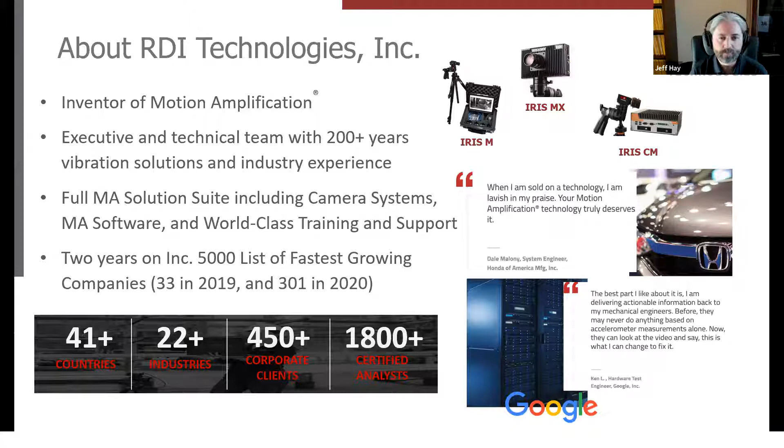Okay, so let's go ahead and get into it. What is motion amplification, right? So you're going to see some videos here. Sometimes you'll see a single video. Sometimes you'll see a side-by-side. The left is an actual real video. The right is a motion amplified video. That's really what that engine is doing, and so we'll loop this and you'll see, but this is an engine startup, right? So on the left-hand side, again, that's what you see with your eye.

You open the hood, everybody's opened the hood of their car and they've watched it start up, right? You can actually see some of the fuel lines start to vibrate there right before this engine kicks on. And you can see it go into the startup and then now it reaches a steady state. But the idea is what we're doing is full field vibration. We're measuring displacement across the entire field of view, pixel to pixel. And then once we can measure that displacement, we're able to visualize it, increase that to a point that it's visible by the naked eye.

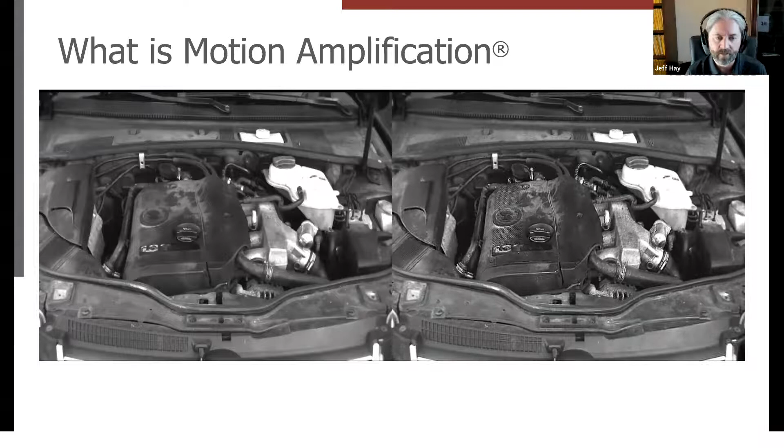So let's look at a couple everyday objects. This is a glockenspiel. I call it a xylophone, but my son's in band and he informs me that is a glockenspiel, and not just a xylophone. So in this situation, you can actually see the key vibrate here. I think we'll pause there for a second. You can actually see the key vibrate, and you wouldn't normally be able to see that with your eye. That's actually 1,170 hertz. So not only is it extremely small motion, but it's extremely fast motion.

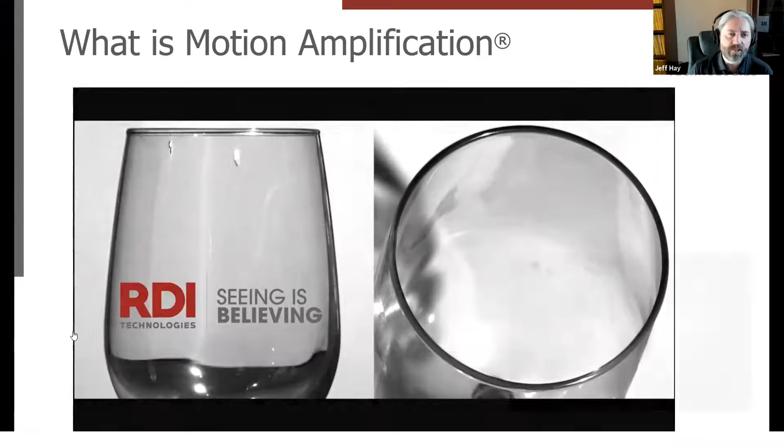And then maybe just another everyday object here. This is a wine glass, right? So that's a wine glass at 750 hertz, just oscillating from a single tap with a spoon, so you just kind of tap it. So just an idea of what we're talking about, but really in terms of technology, what we're trying to do is turn every single pixel into a displacement sensor. So in a nutshell, you're able to measure the vibration across the entire field of view.

So let's take, for example, the scenario of a megapixel camera, right? That's 1 million pixels, and that's sort of a modest camera even. But if you think about each pixel now being a displacement sensor, now you're able to cover the entire field of view with millions of sensors. In an HD camera, that's 2.3 megapixels. That's 2.3 million sensors you've got all over that structure, and you're able to measure the movement of it. And so you can actually do that, and you can actually measure it. You can see it in these examples. We're showing you the visualization, but you can see it.

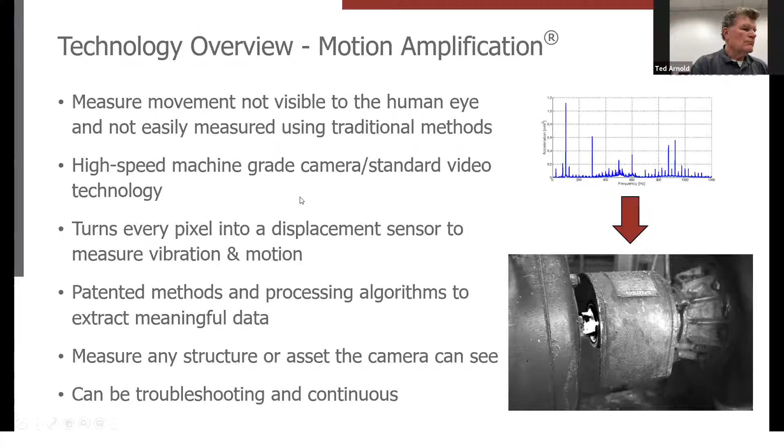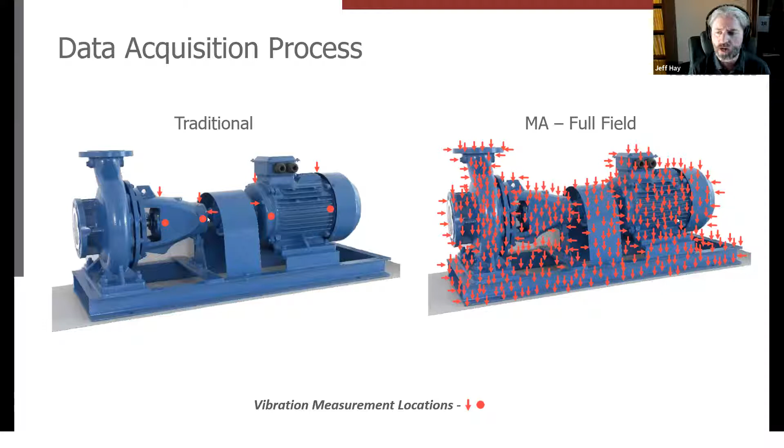Okay, so we talked about this idea of full field vibration, right? So this would be maybe a traditional way of measuring an asset. You've got this motor and this pump here. You might have some contact sensors on it. With motion amplification, again, it becomes that full field vibration. Not a single point is being left untouched with the measurement. So let me show you a short video that kind of hits that home here.

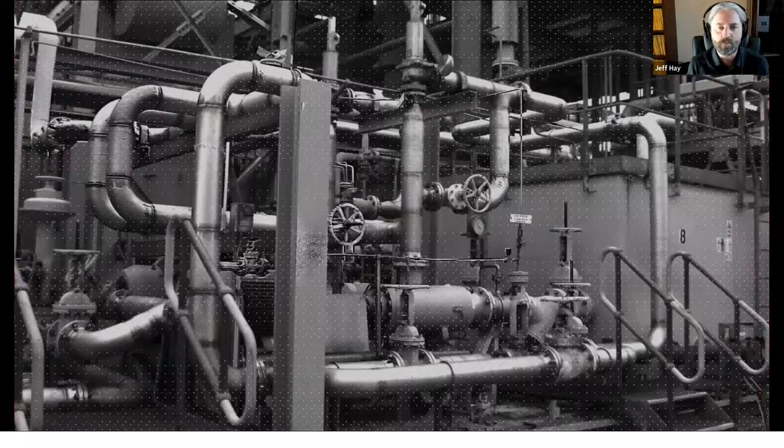So this is the idea that maybe if you had a single data point, you would be measuring that, or two data points, you might be measuring this, right? But imagine if the entire asset were covered in measurement locations, you would see something like this. And this is what you would be missing, right? You would get a high vibration, or you measure some motion, and you would see that, but you might not have any idea that this is going on with your asset or your test cell or your product that you're designing, because you're not seeing the full picture.

So just talking a little bit about the benefits. One is the ease of use. Users of the technology really benefit from the idea that it's more like a GoPro taking video than it is about collecting data. Really, you sit down, and I'll do a live demonstration. You set up your focus, the lighting, you get that right, and then you're ready to take the data. So it really is more akin to taking video than it is to taking data, which I think is more intuitive for most people.

So the non-contact and non-destructive. Those in the automotive industry know that there's lots of times that there's light curtains, things like that you might not be able to get behind. There's barriers to entry. There's areas you can't go in. That becomes problematic. And then of course it's non-destructive. So there's no surface preparation, nothing that you have to put on the object. You literally can stand at a distance and collect all the data that you need.

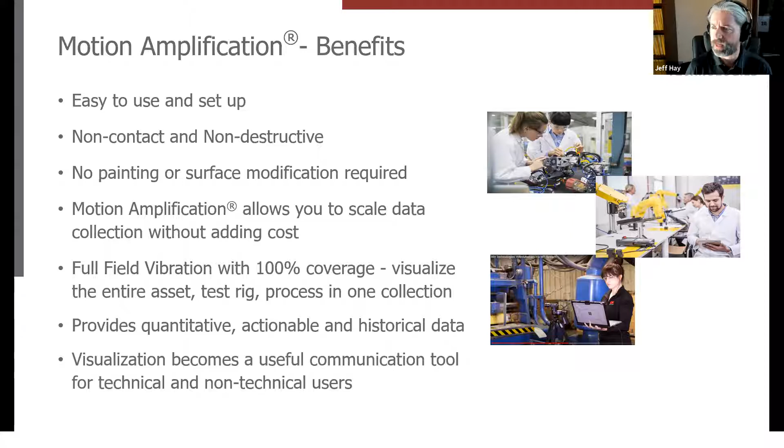So let me give you an example of one of the use cases with the idea of the full field vibration. So in a lot of instances, you need to pre-screen for sensor placement. You're going to place strain gauges on an asset, right? And you think, where do I need to place these strain gauges? Even moving a strain gauge 1 inch over has a tremendous impact on the data. So you really need to understand your game plan about how you're going to collect the data and where you need to be placing your sensors. And that can be a very, very time consuming process.

By using the tool as a pre-screening to understand what your asset's doing and how you need to place those sensors can have a lot of value, save a lot of time, and eliminate a lot of sensors that you need to use. And I'll kind of reinforce this concept throughout the talk in some of the video demonstrations.

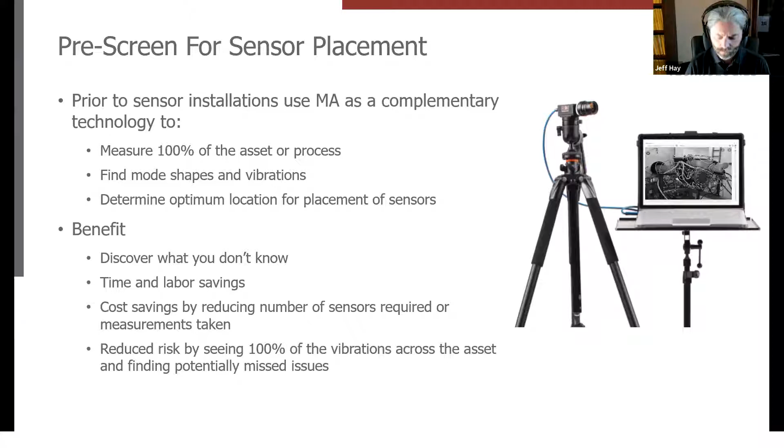So right now, though, what I want to do is a live demonstration. I personally think a live demonstration makes it easier. It sets the stage for a lot of the videos you're going to see in a lot of the case studies. One of the nice things about this demonstration is you can get an idea of the process that's involved. So any of the videos that you've seen so far, or you will see, this is exactly the process that it took to get those videos collected. So let me do that real quick.

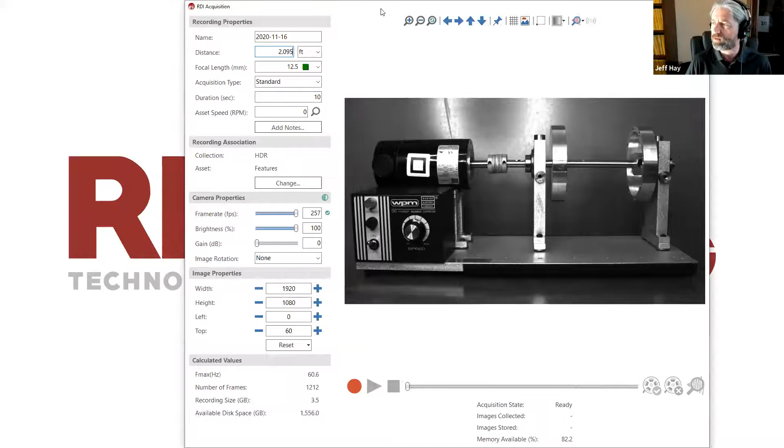And I'm going to turn on our acquisition software here, right? So I've got this little motor rotor kit. These are used to train people with different technologies in measuring vibration and things like that. So one of the things that you have to do is set your focal length of the lens, right? And you put in the distance.

I use a laser rangefinder. You can kind of see that on the screen there, maybe on the motor there, moving around. I just get the distance that calibrates it. I put that in and you're ready to go. So I'm going to turn this on. I've got this on a little smart switch. I'm going to turn that on.

Okay. So I've got that on and I am going to start taking some data. But one of the first things I want to show is kind of the speed. One of the really, really nice things about the technology is you can do it live. So I'm going to adjust the brightness just down a tad here. Get that just right. Here we go.

Okay. I'm going to turn on the live amplification. So you can do this live and show that here. And if you want to actually see how that thing moves live, you can do that with the live amplification. So one interesting thing is to use this as a screening tool. You can set down the tool and you can look at the asset and immediately be able to see all the motions that are present.

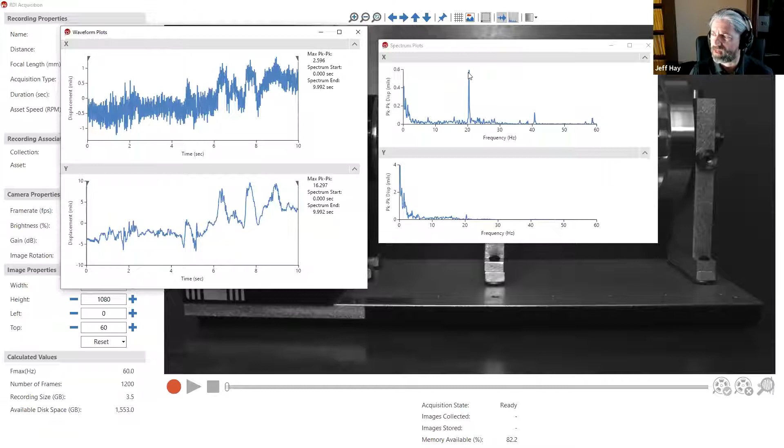So anywhere in the scene, you can draw a box and get a measurement and a frequency spectrum. So that's actually what the asset's doing when I collected that. And that's giving me what they call a time waveform. So that's the displacement in mils, calibrated. And this is the frequency spectrum. So we can see that it's running right around 20 hertz. Right? I can do that anywhere in the scene.

If I wanted to move that box over here to the motor, I can do it as well. And it makes a measurement. So again, this is just a way to be able to do things very quickly in the field to take measurements and understand what the asset is doing.

Now, the other thing too is that we can go to this standard measurement, and I'm going to take just a short 3-second video. So if I do that really quickly, I'm going to turn that off so that the motor is not running while I'm talking as much. And then I can immediately go into motion amplification. And then I can play this back and show you, amplify it and see all the motion. And then I can make measurements anywhere I want, right? Again, just this quick.

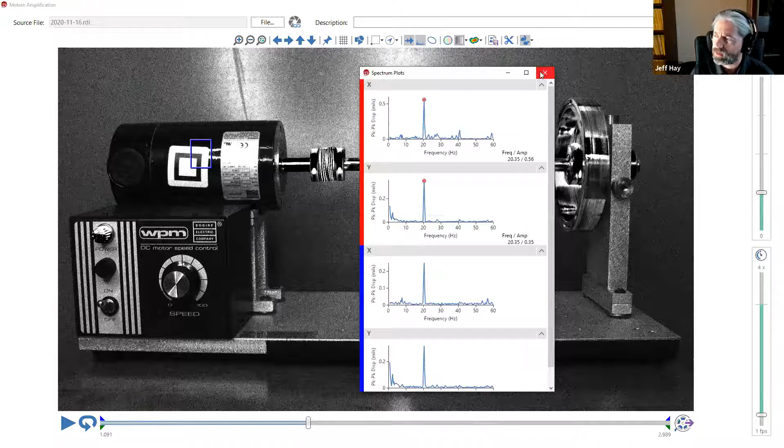And all this data can be stored and saved for comparison. So if you're doing product design, you can archive this data or compare it from product to product to be able to understand it. Now, I had mentioned that there's some other things you can do with it. The displacement measurements are one of those things. But the other thing you can do with the motion amplification videos is filter. So it's also important to understand what is occurring at different frequencies.

So in this case, we can go through and open up this filtering window and say, I would like to be able to see the motion that is associated only with the running speed, that central peak. I could do this for any one of those peaks, but I'm going to pick this one, right? And I can see that it's moving both in the X and the Y. And I can hit apply here. And that's going to go through and do filtering to only allow what's green in that spectrum. So now we're only going to show that one frequency.

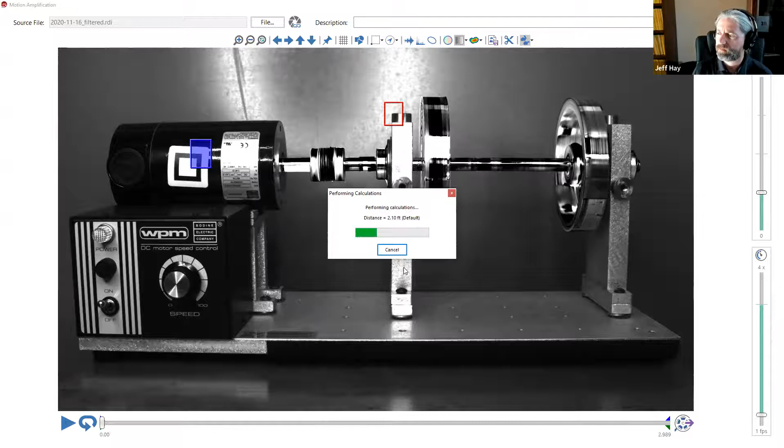It's kind of going through and recalculating all the displacements. But now this is just the motion associated with the turning speed of that motor. So let's say that you had a process that was frequency related, and you had vibration throughout your process that was causing issue. You could relate it back to this frequency here based on the video itself and understand how everything's moving.

Let me move this to a more industrial application. So we've got a question here. It says, can you measure the RPM of the shaft? Yes, you can. So we do have a tool that you can draw a box anywhere on the shaft and it will measure the speed. And then we also have another tool called shaft inspection that allows you to go in and image the shaft. So let me just show you that really quickly.

So bring this back up and I'll turn this back on. And then I already know what the shaft speed is. You could go through and measure it, but I'll just enter it in to show this other, because I think that this is interesting to show. We're right around, let's see where we measured that at.

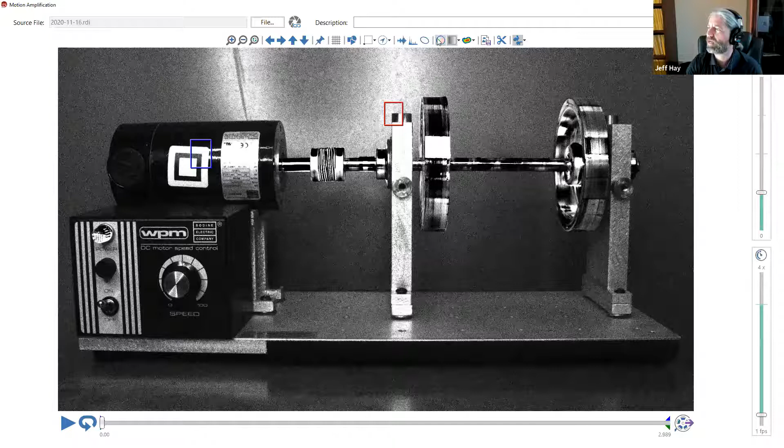Okay, so we had measured it at 20.35. So let's put that in. So if you either measure it or you know what it is, you can enter that in. I'm just converting. I'm a Hertz person, so I always have to pull out a calculator. But this is also shaft inspection too. You could measure that, but it's less interesting as a demonstration.

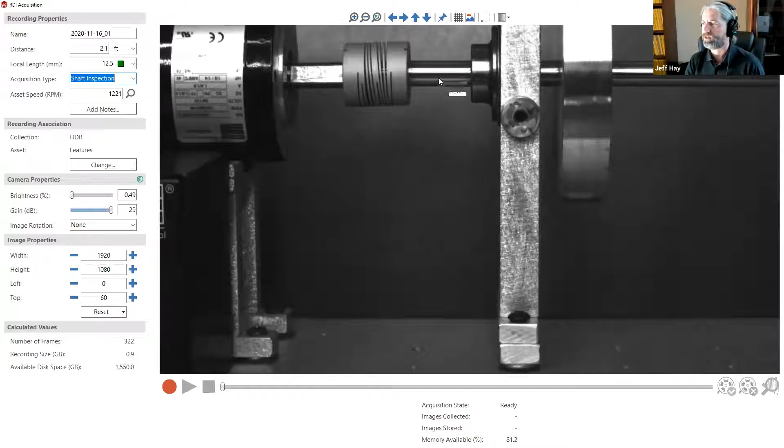This is a little bit more interesting in that you can actually put the camera into a different state to inspect rotating pieces of equipment or belts, pulleys, any of that kind of thing by matching the speed there and actually getting the camera into a different state we call shaft inspection. But it's good for any rotating equipment. Okay, I just wanted to demonstrate that along with that question about can you measure shaft speed, which you can.

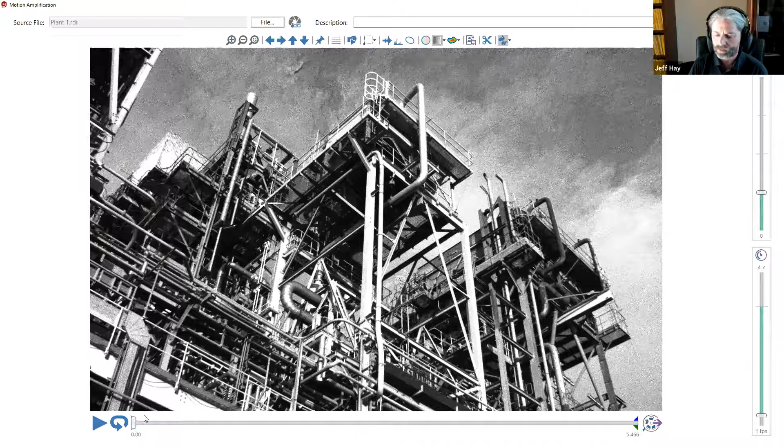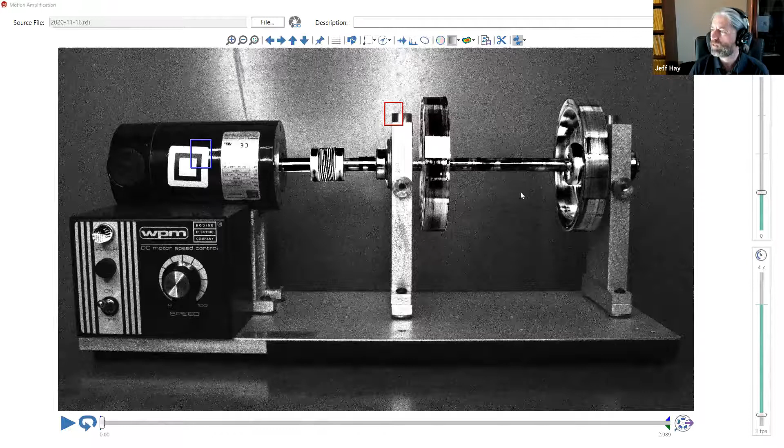Okay, so let me go back to the concept of the filtering. We had just left that demonstration where I filtered the rotor kit, but that's a little less interesting because it is single frequency that drives that. So what I want to do is demonstrate this concept of filtering here. Let me get up the right one. Here we go. Okay, so I want to play this back for you because there's a lot going on in this video. So play this back and speed it up a little bit.

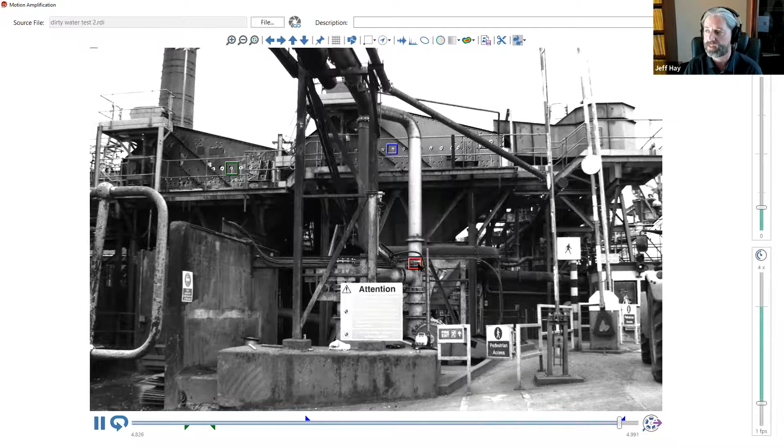Okay, so you can see that there's a screen here moving and a screen here moving, two screens at different frequencies, and then there's a pump moving here as well, right? So I've got my amplification span changed here. You can choose what time you want to amplify. There we go. Okay, so you can see these different things moving. If I pulled up the frequency spectrum, you can see they're all at different frequencies, right?

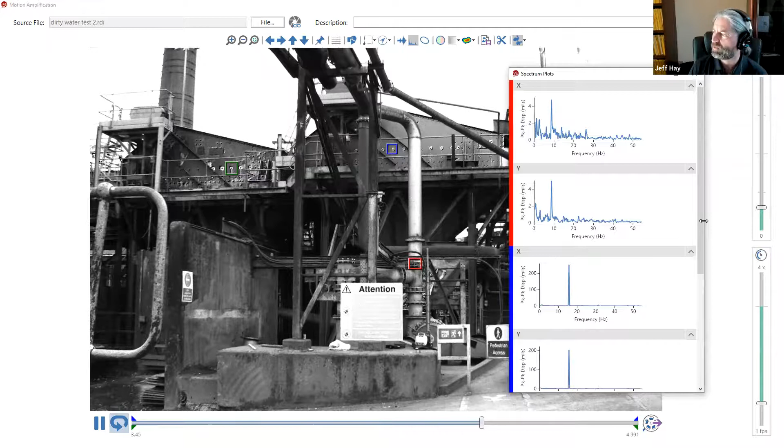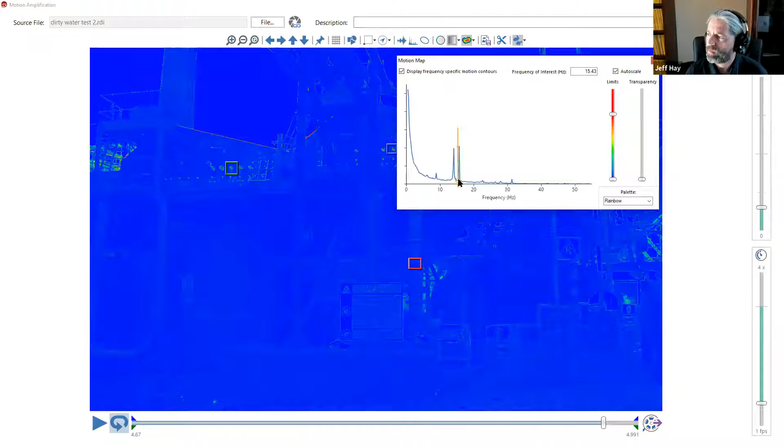We've also had this process called motion map, which is a visualization of frequency with a colorized image. So I can actually overlay on top of this these individual motion maps at particular frequencies and highlight what's moving at that frequency. So in this case, at 15.43 Hertz, you can see it's this screen. And then at 14.02, you can see it's this screen. And then at 8.82, you can see it's the pump.

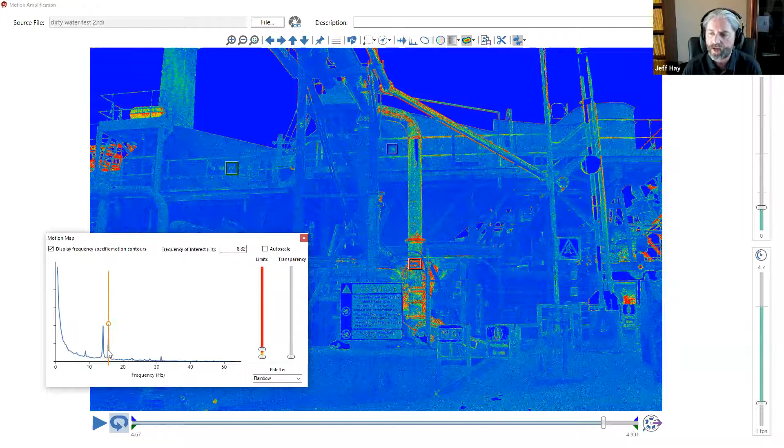Now, let me show you one of the interesting things in terms of being able to evaluate and understand your assets or your product. If you notice, for example, this railing is moving, right? And that might pose a problem for you, and this railing could be anything, an unwanted vibration. And you notice that it's moving at this frequency and you can feel it moving when you walk there maybe. But if you look here, you notice that it highlights at that frequency too, but even more strong, so it's redder under that frequency than it is under this frequency. So you can see that there's likely something going on.

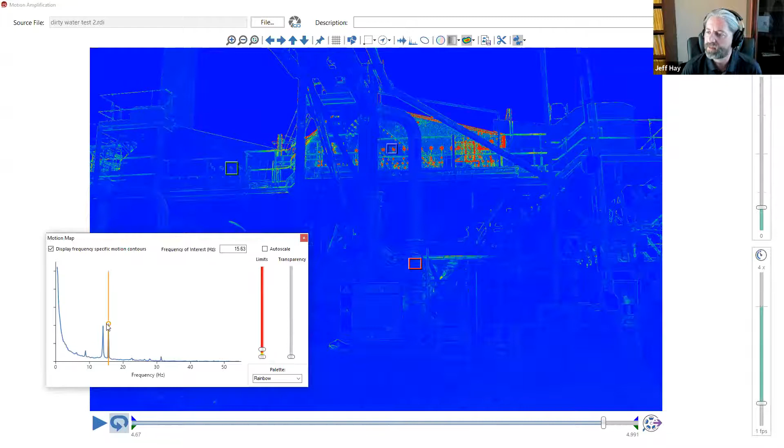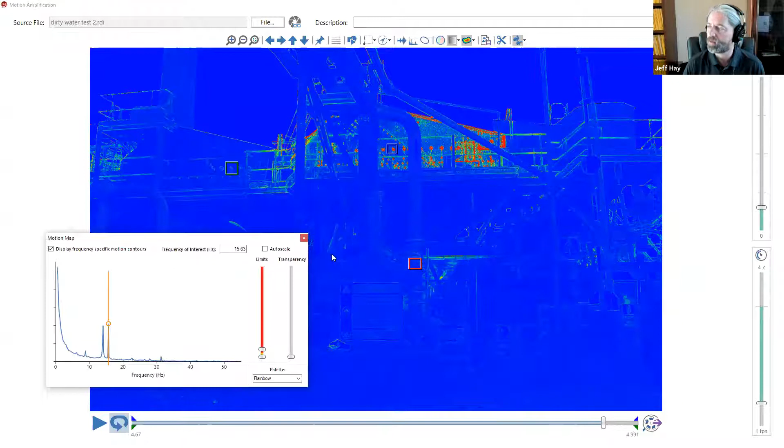Intuitively, you might think it's going to be the vibration of that screen right before it. But it turns out that it's more likely that this screen is coupled to it, or it has a preferred vibration at that mode. So just this idea that you can actually image this so easily across the entire field of view this quickly allows you to be able to see these vibrations.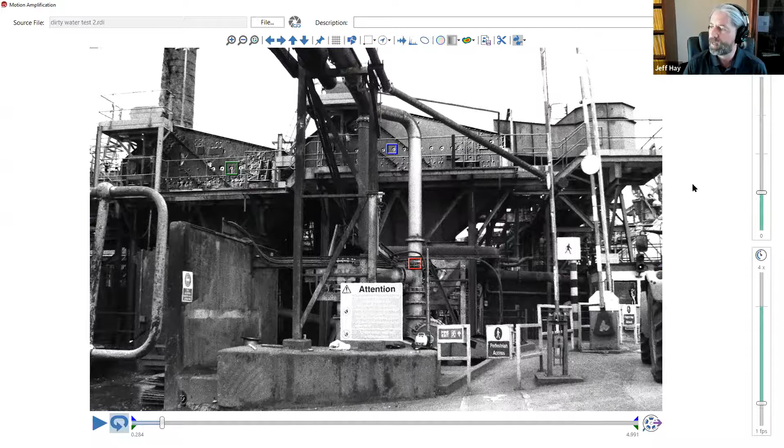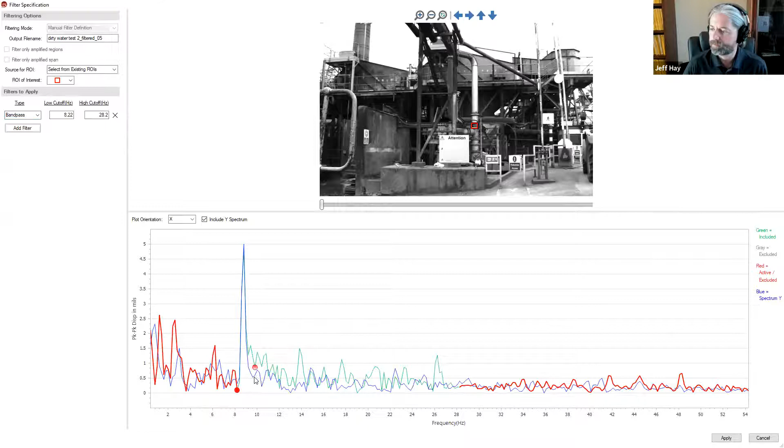And so if you go through and turn this motion map back off, we could go through and filter. Now, again, watch this. You see all these screens moving, everything moving. I'm going to go through and now do something a little bit more interesting than just that rotor kit that I showed as a demonstration. I'm going to filter for the pump, so that's going to keep this area inside there and block everything else.

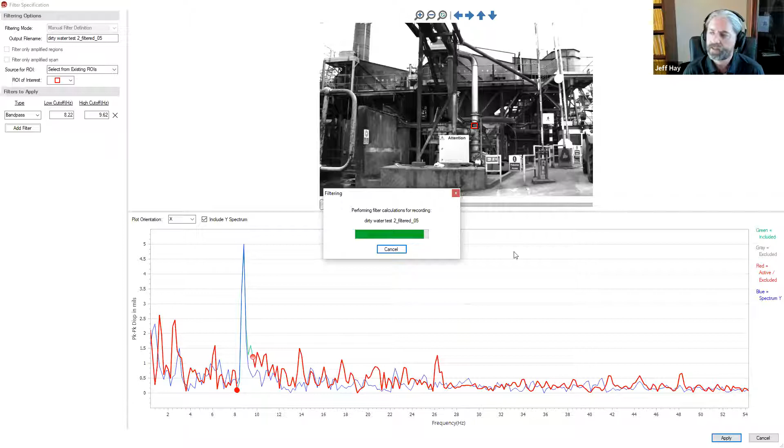So what we should get as a result is the screen should stop moving and the pump should continue to move. And again, this is all done in real time. There's nothing going on here that you wouldn't be able to do in the field. You could be right in front of this asset doing this exact same thing. That's part of why I like to do the demonstration, because this tool is mostly used in an industrial setting, and people need to understand what goes into it.

So, okay, now let's play this back. I'm going to amplify this, and you can see that the screens have largely stopped, with the exception of whatever this pump's doing to shake them. And the only thing that's moving is this pump driving this pipe work all the way through the system. You can see how much vibration it's inducing all the way through this network of pipes, all the way down through here, and then into the system here.

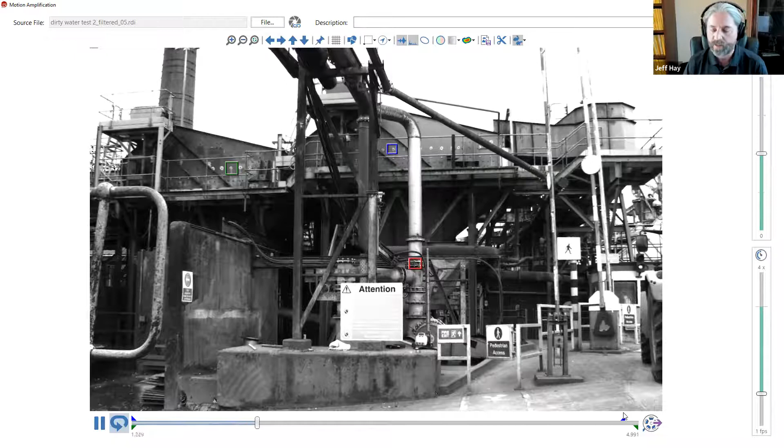So again, I just gave you a short demonstration of some of the tools. There's a lot more that goes with the technology, because really what we're doing is full field vibration. So there's all these new ways to leverage vibration, because we're extracting it from a camera.

Okay. So I might return to some live demonstrations, but I'm going to go into some examples of case studies here. Let me get PowerPoint up here, and let's see if it will behave for me. Okay, there we go. Get all the windows back up. It likes to do its own thing and take over all my screens.

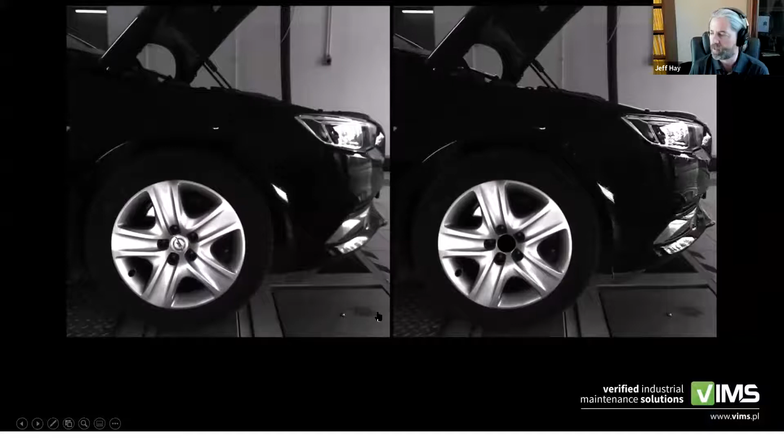So just to give you an idea here, this is in automotive. We're going to go through a few automotive examples to show you product design. This has gone under testing, and this is actually induced vibration here. You can see a little bit of vibration of the wheel, but what's interesting is you can see the vibration all the way through the body. So if you're doing simulated road testing, you can actually visualize how things are interacting with each other and how they're vibrating. And it gives you a very quick analysis.

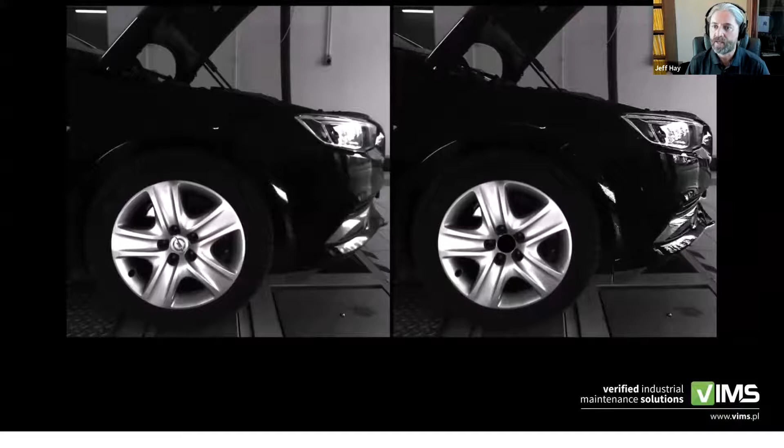To outfit this with sensors everywhere would be very problematic. You can do it in pretty short order with the camera, because you don't have to pick and choose where you measure. It's also really interesting because you don't know what you don't know. You don't know to place sensors in certain areas. Wow, I didn't know that was going on. We would have never thought that.

We had a group that uses it for training on vibration, and they brought it into their test lab. The equipment they actually train on to show faults in mechanical systems had a fault in it, and they just didn't know, because they didn't know to place sensors there. The foundation had come loose. So again, you can see the way all these systems behave.

Let me show you another, a little bit more comprehensive. This is a car testing through revving of the engine. We have this capability of putting vectors on the screen. You're measuring displacement, but we can graphically show how big it is by the length of the vector, and the direction by the way it points. So this is revving of an engine, and you can see the displacement and the way it responds. One of those is a time waveform that's been extracted.

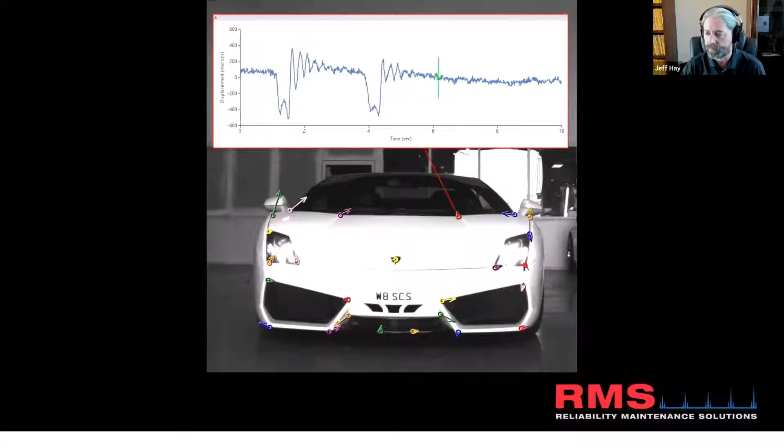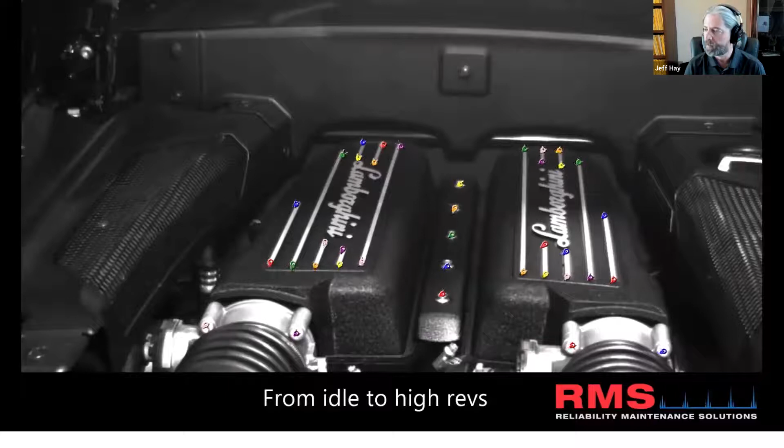So here it is on the engine. Again, just to give an idea, the data is all there. You can pull out all the data and also use it as a communication piece. You can see what's in phase, what's out of phase, what parts are moving together, what's responding to what. When one piece moves, what is everything else doing?

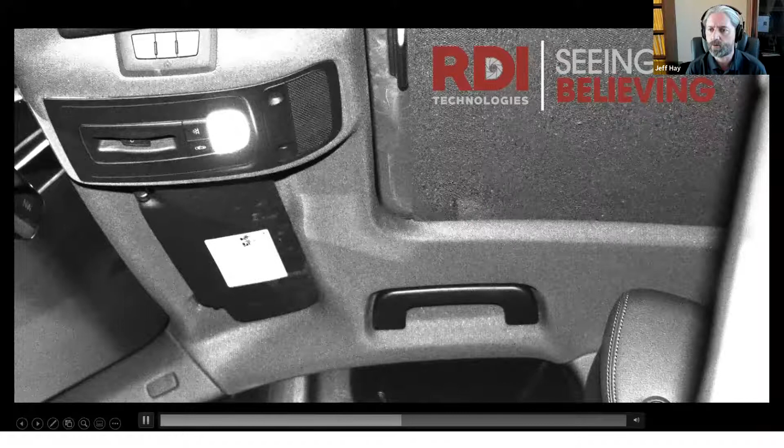This is an actual sine sweep of an interior of a car through a subwoofer playing and actually vibrating and showing. So in this case, we could hear the rattle, but we didn't know where it was coming from. And when you did the sine sweep through this, you could actually see this console panel at the top vibrating and immediately show you exactly where the vibration is coming from. Again, you could apply the motion map to kind of hone in on that as well.

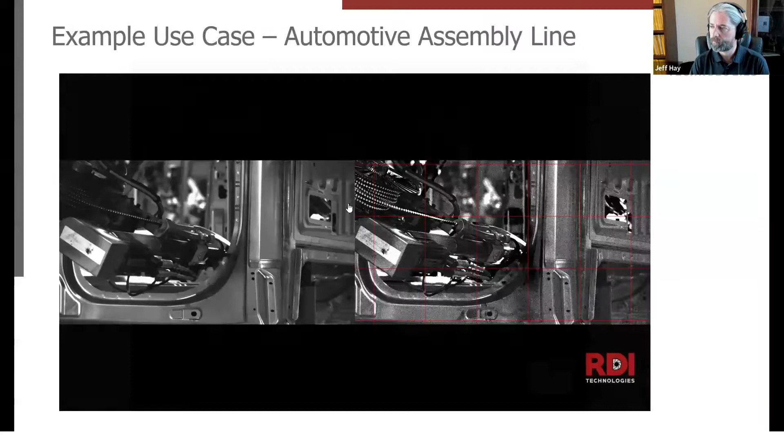So this is a rivet gun. What's interesting about this is one, the failure of the part, but also the way that you can see the body shake as well. Placement of this is really important, but there's also upstream and downstream vibrations that are going on too. So for example, this is all behind a light curtain, so you don't have to stop anything. You can retroactively monitor equipment like this, be able to determine, one, the vibration on those rivet guns, to determine wear and tear. But second, in this case, be able to determine what else is going on, right?

You can't put sensors on those body parts during this process, right? That's actually a piece in production, but you can measure it non-contact this way and see when it vibrates. Is an upstream process causing that body part to vibrate right before the rivet gun gets placed? And could staggering your timing of the different stages in that process help? That's a really challenging thing to be able to do, because you can't stop the process, but anytime you can go with the camera and just simply measure it.

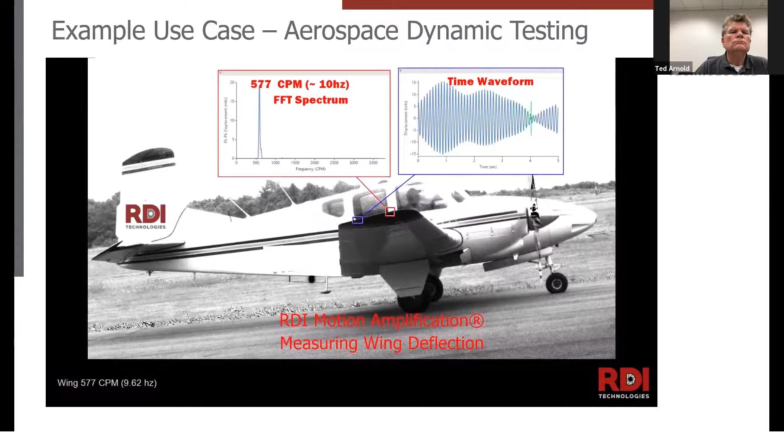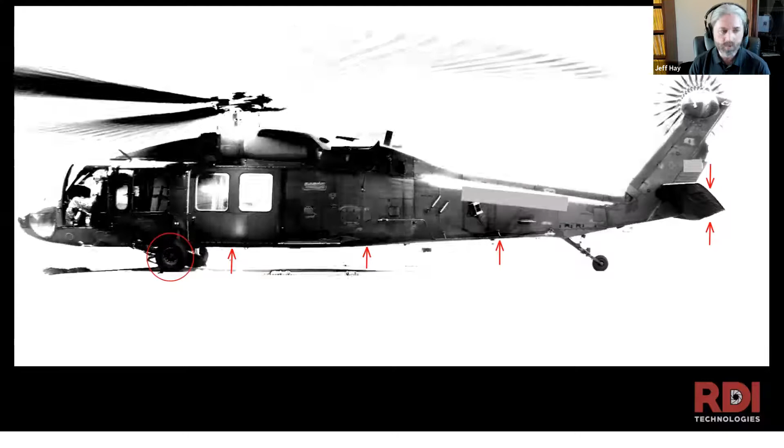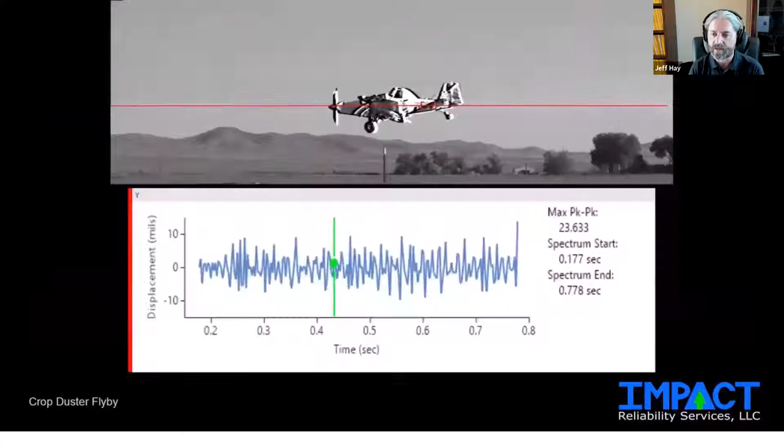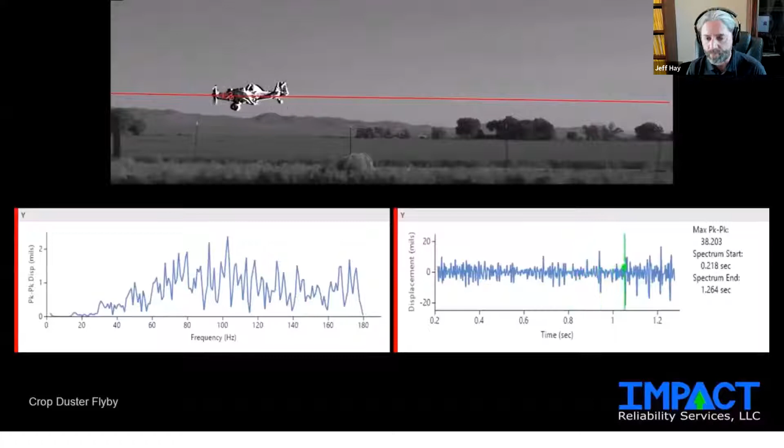So there's a question that came up here about the field of view. I'll play this. One thing we can do is we can actually measure transient vibration. I'll do a demonstration of that in a second. This kind of gives you an idea, but there isn't really a limit on the field of view. You can use different lenses, like wide angle lenses, or back up. If you were up against the wall, you would have a limit, but you could always go to a big field of view with, say, a wide angle lens. As you move away, it does affect your resolution, but at a meter away, you can see about 0.25 microns. So if you double your distance, at 2 meters, it becomes 0.5 microns, and you can start to get an idea of how that works.

Okay. So this is a turbine engine test cell. So that's another area that gets a lot of use in terms of test cells, being able to outfit this in test cells. So I kind of mentioned being able to do this continuously. So the long-term recording method of doing this covers this 24/7.

You could have three units permanently mounted. You network them together, and they communicate with each other, and they all work together to save time-synchronized video data. So you could have this outfitted in a test cell with multiple cameras all measuring simultaneously.

And so one question was, can you directly compare videos of the same equipment over time? Yes, you can. That's all organized in a database that allows you to compare it. There's a video editing tool where you can do quadrants or side-by-sides of video and compare them that way. And then also the continuous monitoring solution has some of that built in as well. So just a little bit about that.

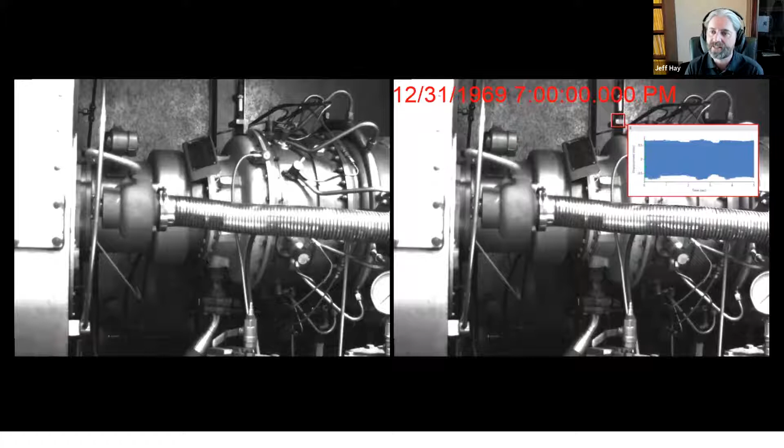I can go into details about that, maybe if you want to reach out directly, but in terms of being able to measure these things long-term, yes, you can. And you can compare that, and the data can all be exported out into a CSV file as well.

So let me show you one example on this. I'm going to go back into the software here and just show this data set in real life here. Pull it up. Okay, here we go. So bring that up.

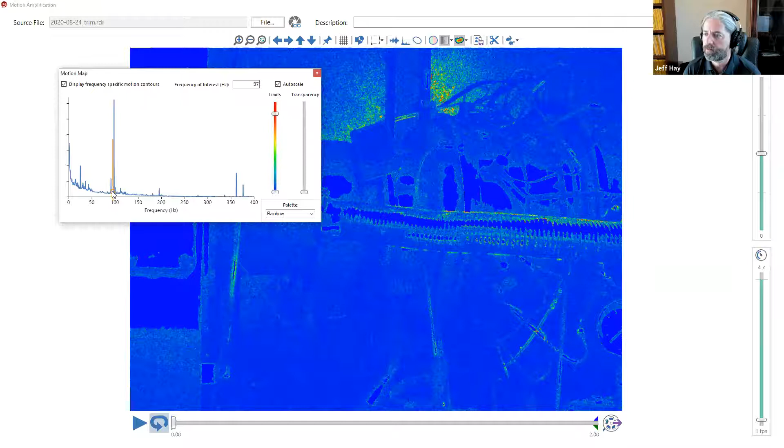So one thing is you can bring up this motion map and see there's a lot of things going on here, but it allows you to really filter in, zoom in here on some of this stuff really easily and see all these things moving at different frequencies, right? And there's a lot going on in these test cells with large equipment like this. So here's something at 97.5 hertz. You can see some heavy vibration. So let's bring up the filtered data set for that.

And this is one of those, you don't know what you don't know, right? Did you know this nozzle was moving? Maybe that's okay. Maybe that's not. Maybe that puts strain on that. And that's not okay. In a lot of cases, it's not. But again, you don't know what you don't know. And you might not have any idea that some of these pieces are moving.

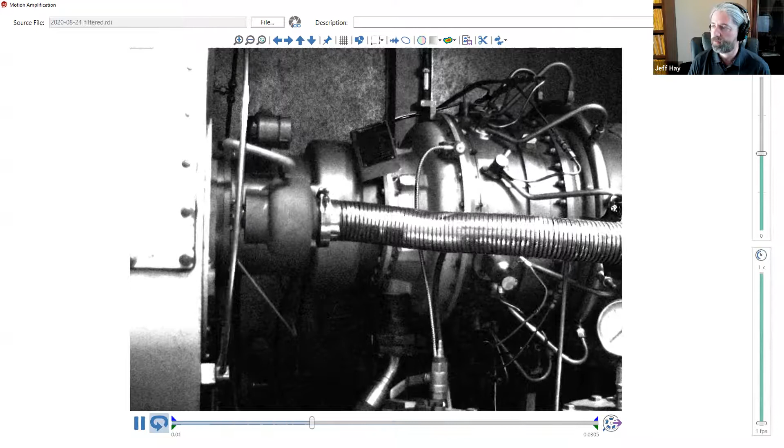So being able to get this level of look at it is really where some of the power of this whole idea of full-field vibration is, and being able to measure that. Okay. So we'll pass over that video. It just replaces the live demonstration.

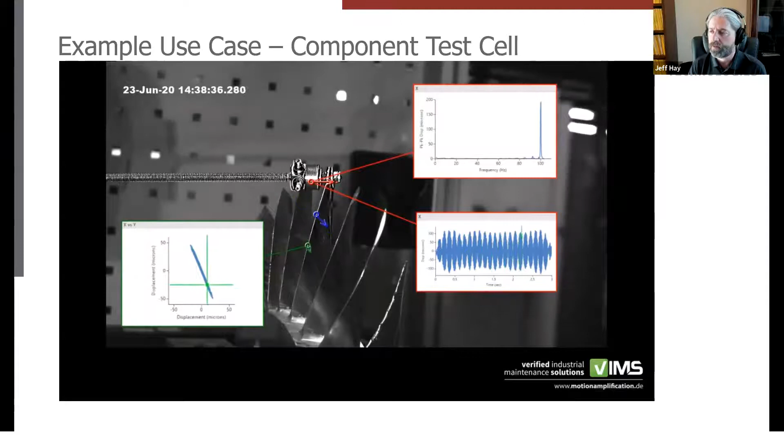So component testing is another one. We mentioned the test cell, being able to go through and make measurements of product design. This is going through a series of wear and tear testing to be able to understand what that product's going to do over time. And again, they're just inducing this quickly to be able to measure it. And then you can visualize and watch the process the entire time. And talking about this whole sensor placement, you don't know what you don't know.

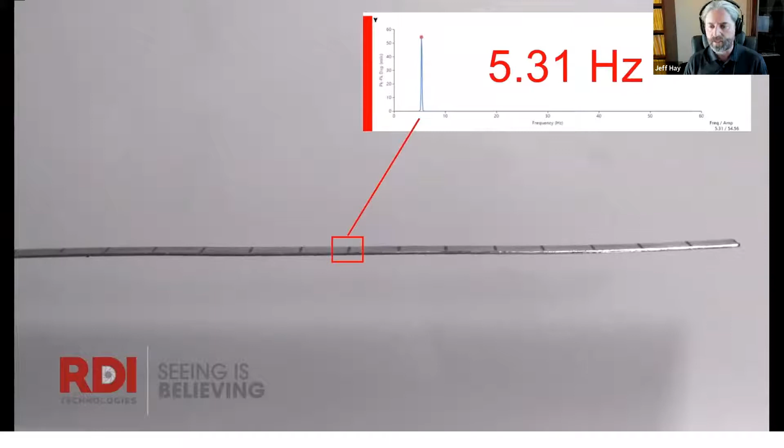Let's see here. Let's show this sort of video. This is called the observer effect, where when you actually make a measurement on something, you fundamentally change it. So you can see with zero weight, the frequency there. But when you add a weight, say a mass, even a small mass right here, it fundamentally changes the properties of the object.

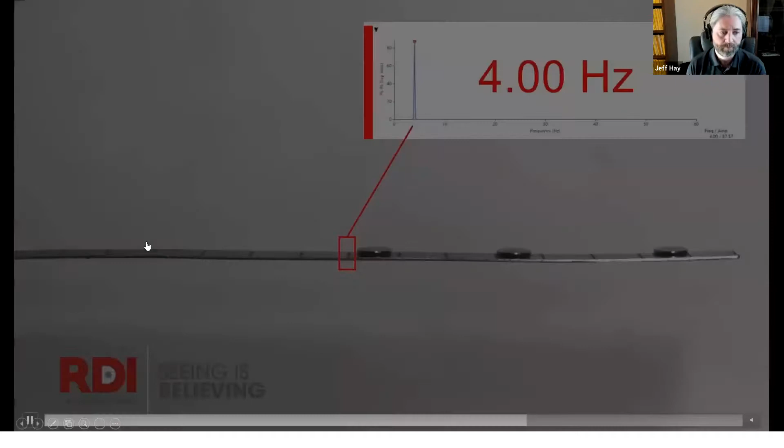So again, hitting home this idea, non-contact measurement in conjunction with testing allows you to make it more true and accurate, especially when it's a lightweight object and you can't withstand mass loading in your testing. So just to give you an idea of how that works, there's three weights, and we're just changing the fundamental frequency based on changing the mass.

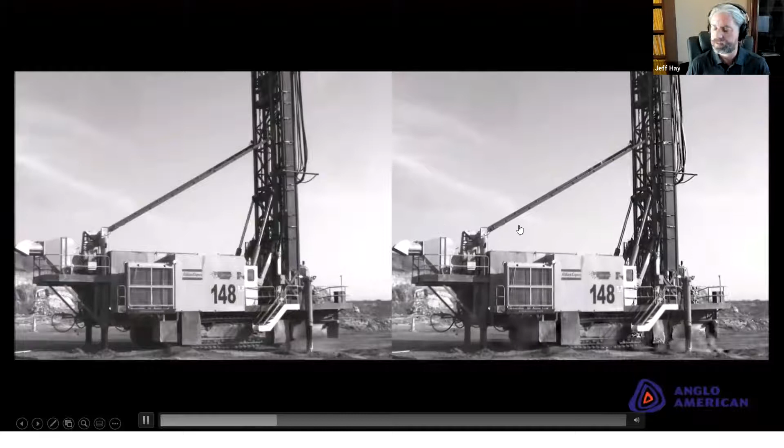Okay. So we'll go through a couple industrial examples. This is a mining rig that they were breaking shafts on. They had no idea this was inducing a yawing, partly because it's at low frequency. And again, we're measuring displacement.

So lots of times people have accelerometers, but they don't have really great ways of making displacement measurements. And that's possible with this tool because that's the fundamental measurement. And so you can measure low-frequency components, which is hard for accelerometers traditionally. So it's also a good complementary tool in that case.

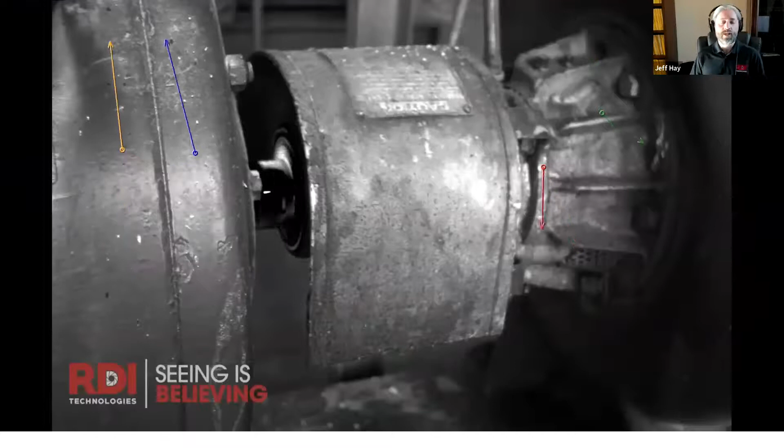Again, here's that motor blower combination we showed earlier. And this is misalignment. And it's just easy to see, when one side goes up, the other goes down. Those are out of phase with one another.

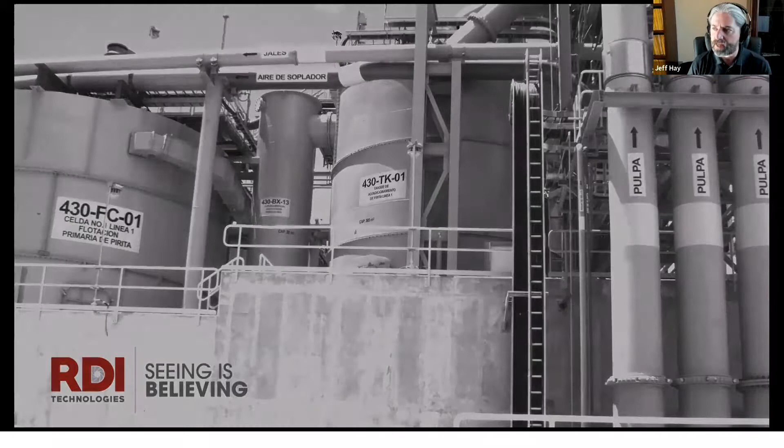Sometimes it looks so obvious in the videos, but you wouldn't be able to see any of this with your eye. This was a facility that uses the camera in commissioning. So anytime a new asset comes in, they tie it to their commissioning testing, and we're able to show this to the OEM to have them fix this tank. So let me show that again.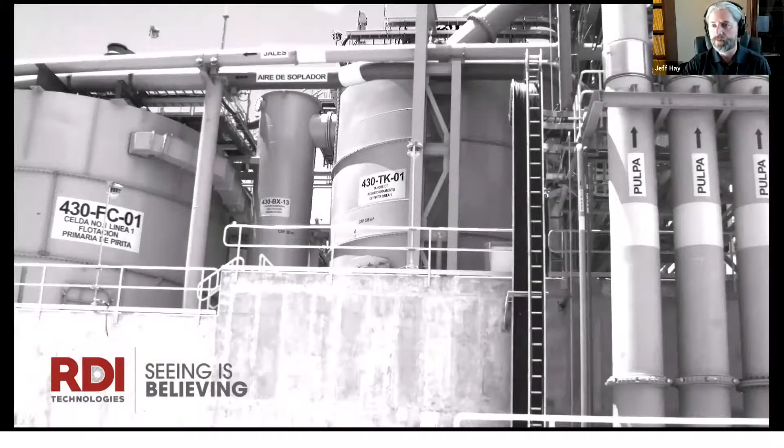And again, it's a hard conversation sometimes if you tell them the tank's doing this. When you show them the video, you're on the same page when you show somebody a video like this to be able to explain what the problem is.

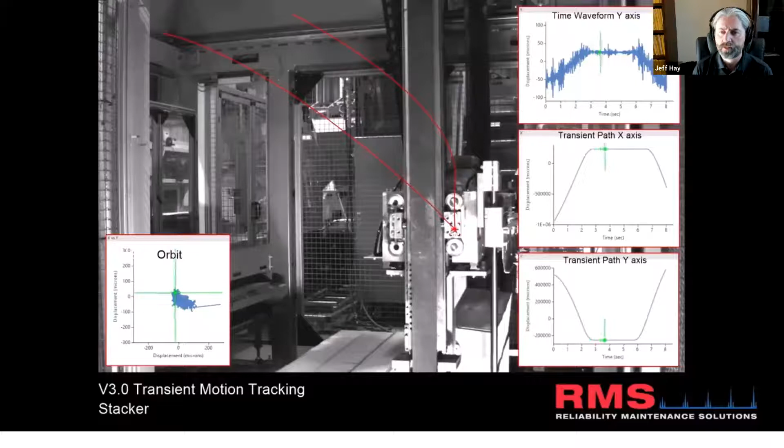So again, this is just sort of in your manufacturing. Again, that idea that you can track things along the path. So you can look through glass if you need to, that sort of thing, and be able to track and measure the dynamic motion.

Let me show something here that is, I think, used a lot in the automotive industry. This is a robot. We can actually track the motion of the robot. You can see on the upper left the transient motion. That's the global motion of the thing. And again, this is because we're using a camera. We're not confined to that sensor that's just affixed to one location.

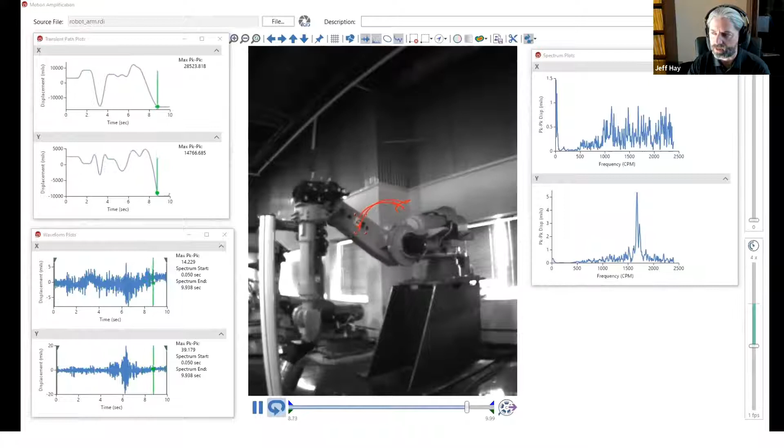And what's interesting in this case is accelerometers and strain gauges, that sort of thing, can't really measure bulk motion very well. Whereas with the camera as a displacement tool, you can track it all the way through the image. So we're measuring the transient path here. And then this waveform plot is the dynamic path. So that's actually the vibration that's occurring as it's moving.

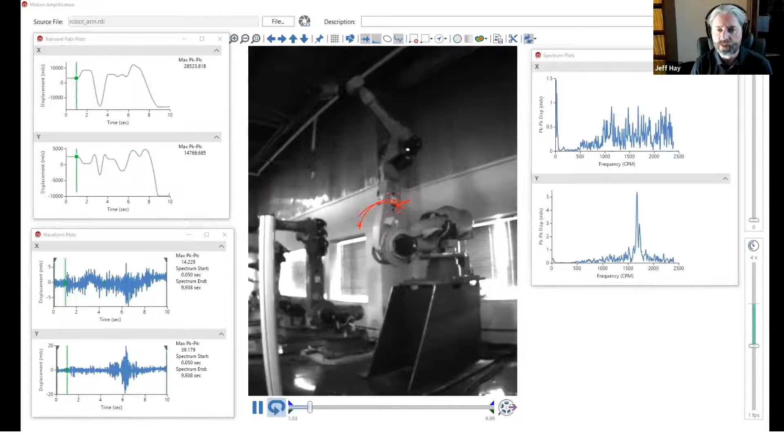So it's sort of like that box that you see here that's moving with it. It's the vibration in that box. So it's measuring the dynamic properties. And once we can get the dynamic properties as it moves, you can actually get spectral analysis. So you can actually see the frequency of vibration of that robot as it's moving through the scene.

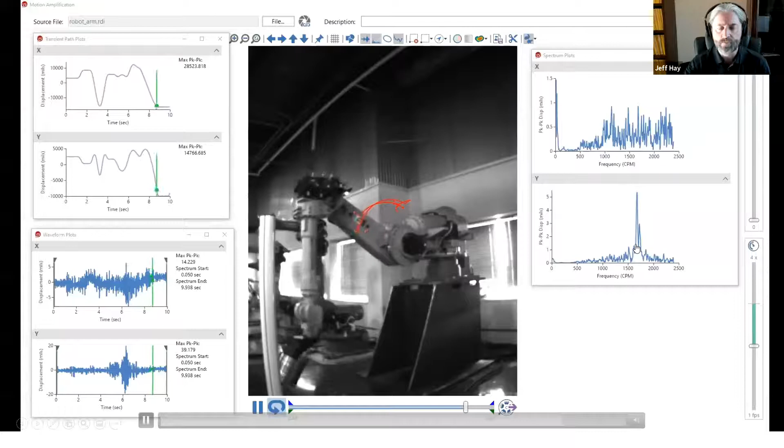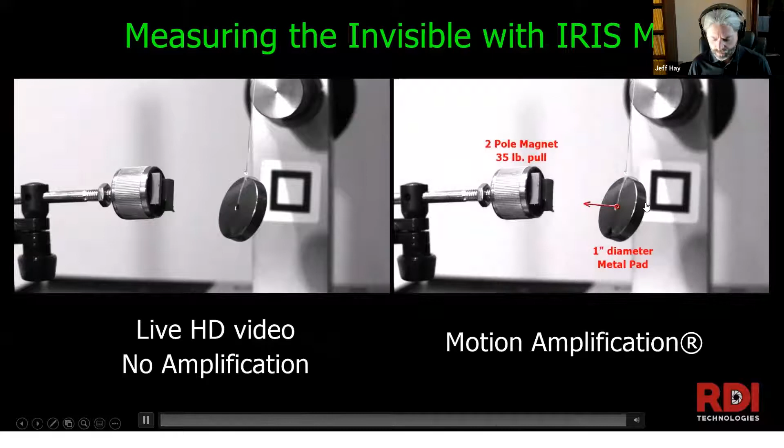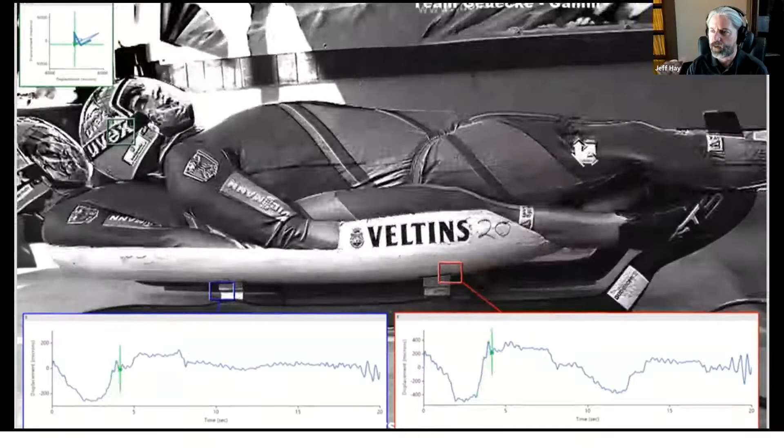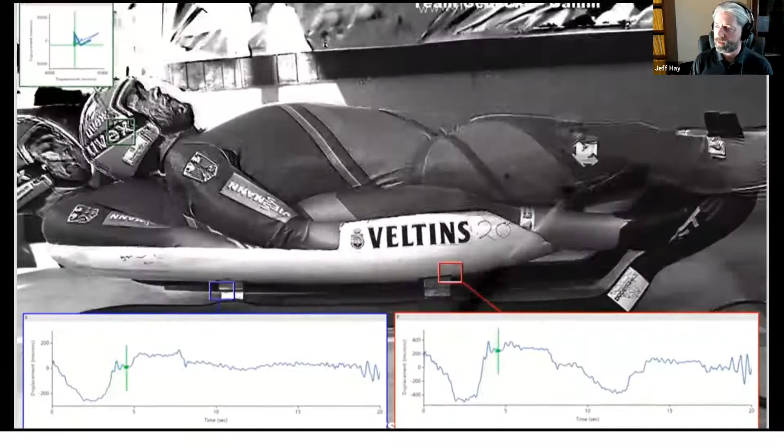So this is the German bobsled team. They were in a wind tunnel simulating bobsled runs, and they're just trying to get the drag down. So what they were using the camera for is to actually measure the vibration under different situations to see how streamlined is this? Where's the energy going? Is there excess vibration going to different locations? Because that's all going to make a difference.

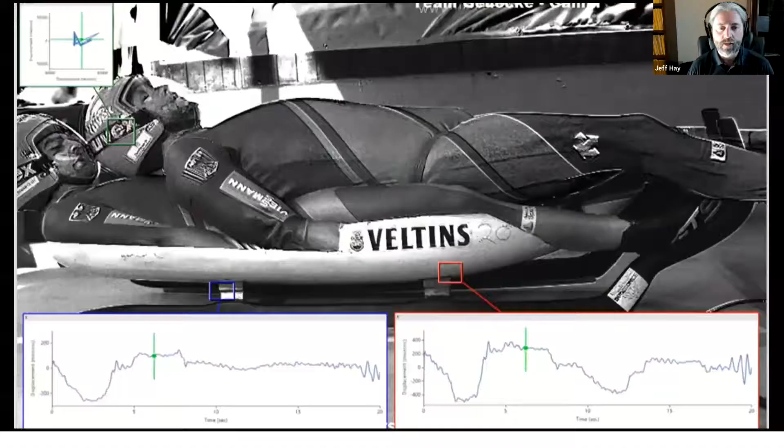You shift your weight just a little bit to the left or right, and it totally changes your trajectory. And even milliseconds could be the difference for a gold medal. So every little bit helps. So that's really what they're after there in trying to understand that.

So just a couple more slides here. What we're showing here is the idea of acceptance testing. We've gone through some household products before with the technology and just compared them from product to product to show what the difference is, to be able to set limits and understand what a pass-fail looks like,

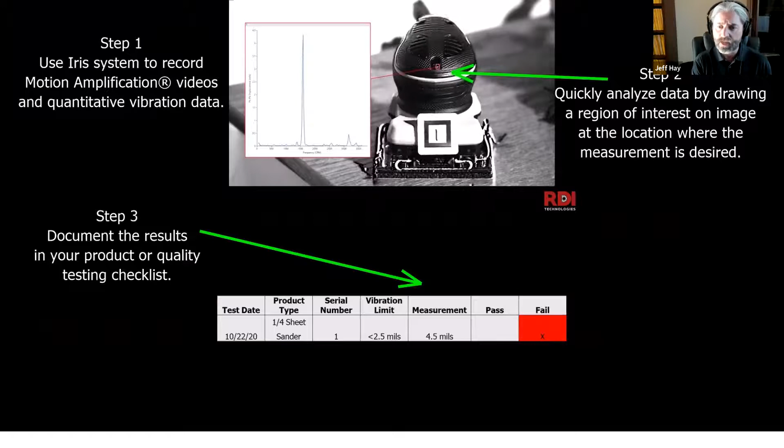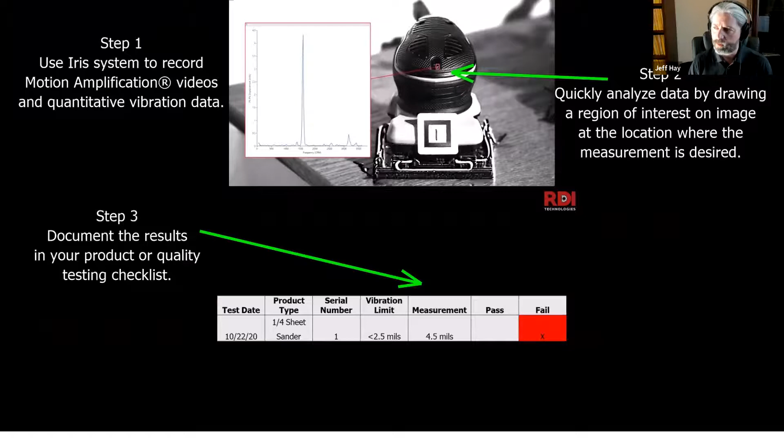and then actually be able to go through a series of tests with different ones. This happens to be a sander, and then knowing which one has excessive vibrations in a simple pass-fail test. And then finally, just one more slide here. We're coming up on that 10-minute mark.

This is DNA, so a very different application than all the others, but it's very interesting to be able to see the way that DNA is vibrating. And this was actually done with a microscope. So you can attach the camera to other systems to be able to look at them. I don't know if anybody in the audience is actually doing DNA testing, but if you are, here's an application for you. But interesting nonetheless.

Everything moves, and we all want to understand what that motion is to either make the product better, be more efficient in our processes, or save unplanned downtime through understanding those processes.

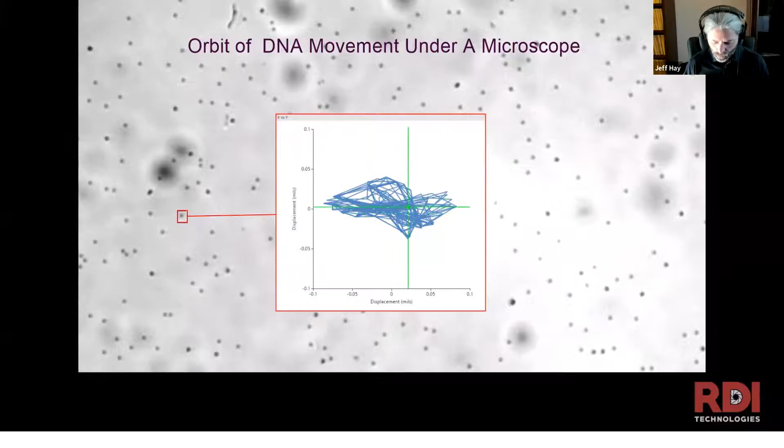So the first one says, let's see, we got one here. With the continuous monitoring, can you set up alarms? Yes, you can. With the continuous monitoring, you can set up alarms through contact accelerometers or 4 to 20 milliamp signals. So if you have any generic signal that you want to send to the system, it will trigger off that.

You can set alarms based on, from there, it handles a general purpose IEPE sensor. So between those two, you can do pressure, you can do process signals, you can do an impact hammer, you can do velocimeters, you know, velocity probes, a whole host of things. You can use shaft RPM, so a laser tach can actually trigger it based on speeds.

And then the other thing that's really interesting is what we call an ROI trigger, which is a region of interest trigger. That's really a virtual sensor. So the camera itself can monitor that location in real time and actually wait for the displacement in that box to get above a certain point or in a certain frequency spectrum to trigger an alarm, and it will save.